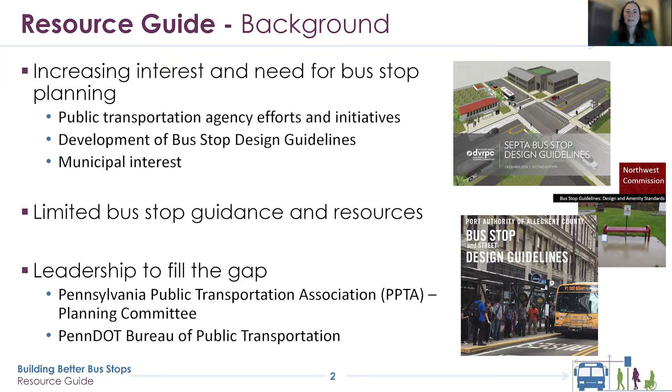In addition, there's been a lot of municipal interest in bus stops, and particularly how to improve bus stops as part of land development projects. So while there's been all this increasing interest, there is a lot of limited bus stop guidance. Particularly in Pennsylvania, there's over 34 different agencies that operate fixed route service throughout the state, and really only a couple had bus stop design guidelines available. So everyone else was borrowing SEPTA's, I would say. And many of the guides available both within the state and across the country are focused on much more urban contexts. So there was this gap of how can we support bus stop planning and better bus stop design for suburban and rural communities in Pennsylvania?

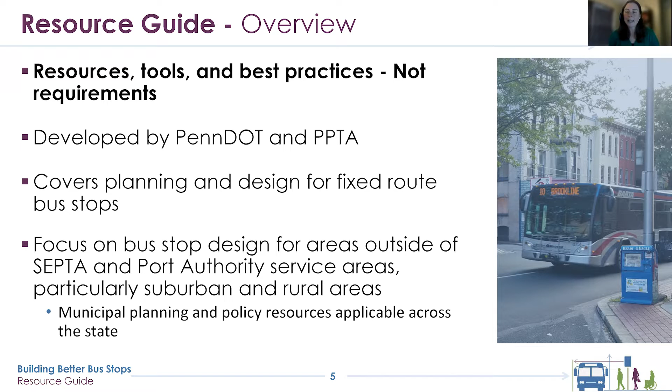It covers planning and design, particularly for fixed route bus stops, but some treatments and strategies might be appropriate for other types of bus or transit service, such as paratransit. We focused particularly on suburban and rural areas, but the planning and policy component is applicable across the state.

However, we know that enhanced bus stops are relatively low cost, and they can have a significant impact on safety, on ridership, and on transit operations. So the resource guide hopefully gives some solutions to solve these common challenges with bus stops.

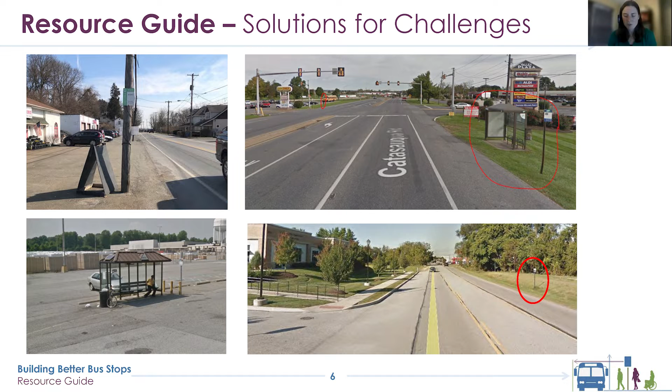One of the issues I've encountered recently is that bus stops are really challenging. They seem so simple, but when you try to make bus stop improvements and enhancements, it becomes very difficult. One challenge is that each stop or location may have different requirements in place, so it's hard for anyone involved with bus stops to know the requirements and steps—it depends on the location.

Each municipality may have different zoning or other ordinance requirements, or requirements for building permits. It depends on the type of improvements—if they include a shelter, you may have to involve PennDOT or an advertising agency. It might also depend on the funding source; if you're using federal funds, you may have to go through NEPA, including Section 106 coordination for historic resources.

So it's hard, I think, for all of us—whether a municipal representative, designer, planner, or engineer—to know all these different requirements and what you might encounter when trying to make a bus stop improvement. So this is really a call for all the creative minds: if you want a challenge, start working on bus stops.

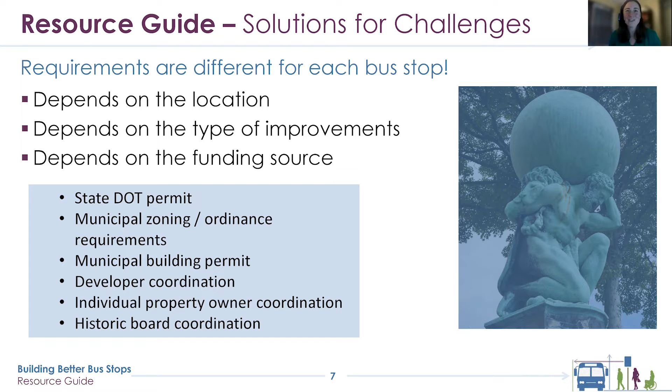One of the key challenges and opportunities is that bus stops require partnership—there's a village that's involved. Interagency coordination and partnerships are critical to successful planning and design of bus stops. Municipalities control land use, transit agencies operate service, PennDOT provides funding, and MPOs and RPOs do long-range planning and programming of federal and state funds. Everyone has a role to play, and it's important to understand those roles and how everyone can work together to improve bus stops.

The rest of my presentation will give a quick overview of the resource guide. It's organized into three parts: Part 1 is planning and policy resources, Part 2 is design resources, and Part 3 is typologies. For everyone who needs the Reader's Digest version, there's a 10-page quick reference—a brief summary that's a great tool if you want to share this document with municipal or elected officials who don't work on bus stops daily.

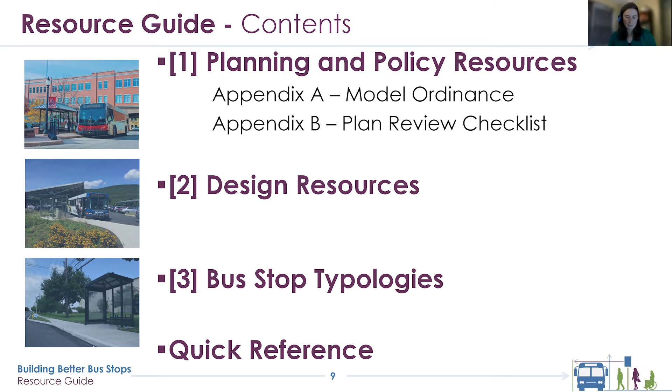I'll first start with Part 1, the planning and policy resources. This part is particularly geared towards municipalities, transit agencies, MPOs, RPOs, and planners. But if you're a traffic engineer on the call, don't fall asleep—there are planning elements critical for development of transportation impact statements or studies, as well as reviewing land developments, which you may do on behalf of a municipality.

Transit is heavily influenced by many aspects of land use, including density and design. Municipalities, as the ones that control land use in Pennsylvania, have a key role to play to encourage development and design that can foster public transportation and provide community benefits related to public transit.

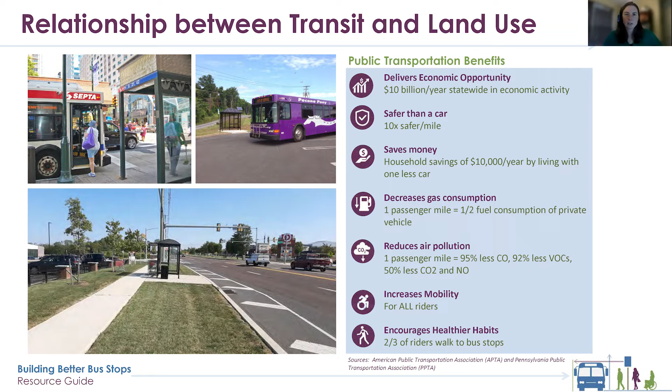There are a number of opportunities for municipalities to incorporate transit into their fundamental plans and ordinances, such as the comprehensive plan, zoning ordinances, SALDO, and the official map.

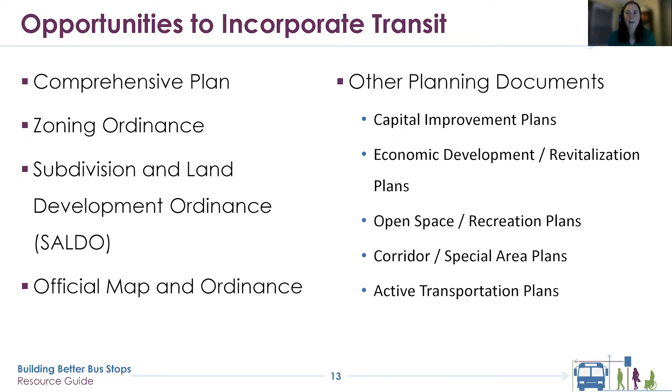The resource guide highlights some key steps for incorporating transit into municipal plans. One thing to note is that it's at every step in the planning process. It starts when you're evaluating existing conditions, knowing both where you have existing routes and stops, and also knowing where you have potential transit generators or communities that might need transit.

The next phase in planning is often looking at future needs and conditions, thinking about how land use and demographic trends might change your need for transit. And lastly, incorporating transit into some of the recommendations included in the plan.

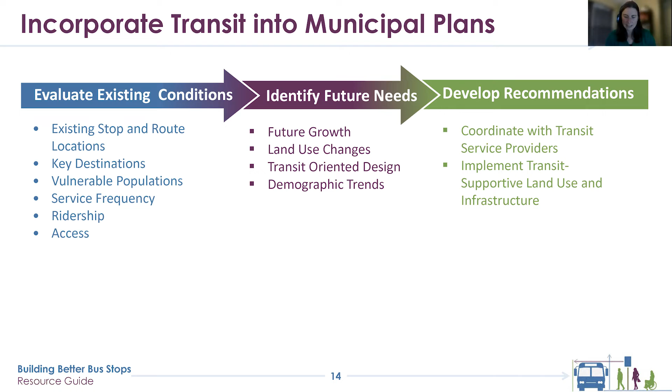The resource guide summarizes some of the best practices for transit supportive land use. This includes concepts such as focusing growth along transit corridors, requiring pedestrian networks within a site, and reducing parking minimums to encourage transit ridership.

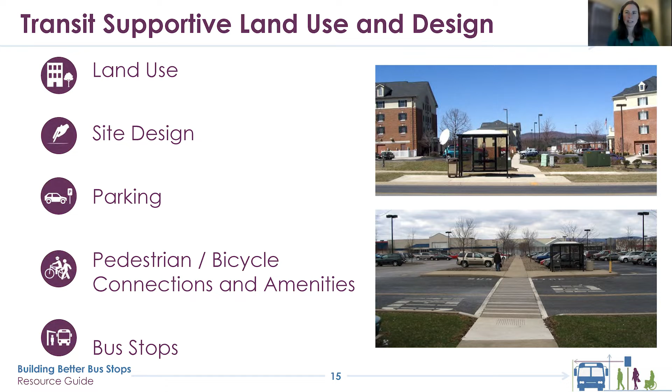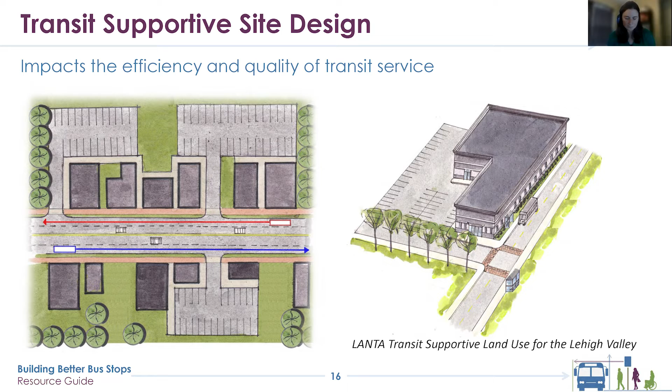One of the key resources included in the guide that I hope is helpful to all of you is the model ordinance language. There's model ordinance language for both zoning and subdivision and land development, or SALDO.

The model ordinance language includes clear definitions of common elements of bus stops. This is one of the most important things, especially if you want to start asking developers to help with providing bus stop infrastructure, so that everyone is talking the same language about the potential improvements.

The model ordinance also provides guidance related to the location and design of bus stops. An important one is requiring coordination with transit agencies, as they're an important part of the planning process. It includes some specific design guidelines and requirements for bus stop infrastructure, including ADA loading pads, bus shelters, benches, and signs. So the model ordinance language is a great starting point, but it will need to be modified and tailored to the specific needs of each community.

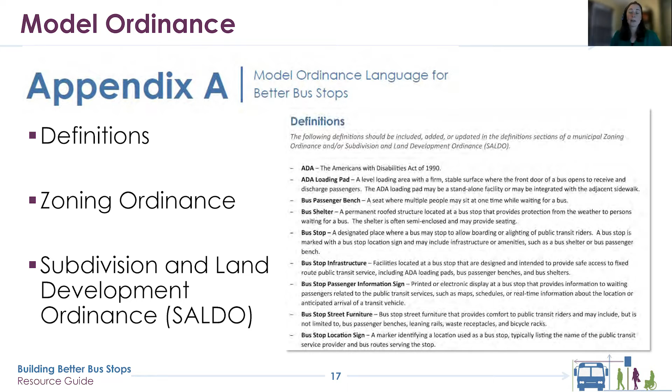We have heard that some municipalities have already incorporated some of this language into draft SALDOs in particular. I believe Lower Merion Township and Susquehanna Township have incorporated and utilized this model ordinance language as a starting point for their SALDO updates.

The guide also includes a plan review checklist, and this can be used by municipalities, designers, or others to evaluate whether you should be considering a bus stop and if the design plans include appropriate infrastructure.

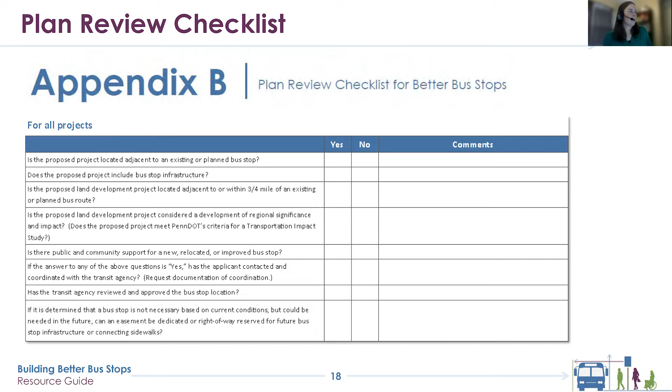I'm also going to share in the chat some links to SEPTA's Transit Supportive Community Development Initiative page, as well as the checklist that SEPTA has developed. It was based on the checklist in the Building Better Bus Stops guide and can be used specifically within SEPTA's service area. It's a great resource for municipalities as well as designers.

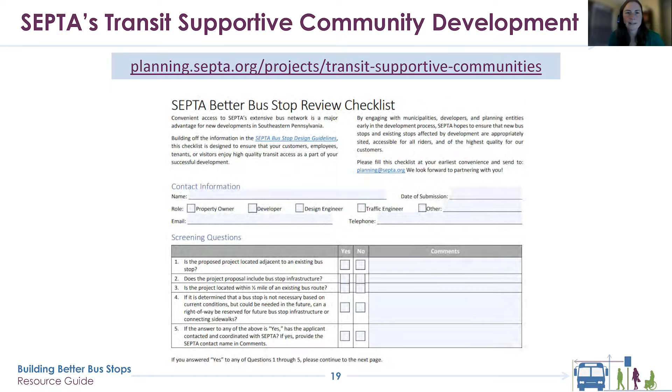So I often hear people say, well, it's great to have plans, but we really want to see improvements. We want to get something done. How do we implement bus stop improvements?

The guide provides a couple of different strategies and resources for implementation. First and foremost, one of the most cost-efficient and effective ways is to simply incorporate bus stop improvements as part of other related projects. It may be a transportation improvement project led by the municipality or PennDOT, and the PennDOT Connects process is a great opportunity to start the dialogue on what transit infrastructure may be needed and appropriate, and can be incorporated into a transportation improvement project.

So now let's talk about some of the design resources. This is part 2 of the guide, geared more towards transit agencies, PennDOT engineers, as well as municipalities. Something to stress is that bus stop designs should be developed through coordination with the public transit agency, the owner of the roadway, and possibly the adjacent property owner. So you can't do these designs in a vacuum.

Bus stop design directly impacts public transportation riders in terms of accessibility, safety, comfort, and convenience. But the design also impacts the quality, efficiency, and cost effectiveness of the public transportation operations. Since each bus stop is unique, the design has to be based on the specific context, the potential users, the roadway, roadside features, and the land use context.

So while this guide, and you'll see some images included that show example bus stops, really those are just a starting point to generate ideas. Each bus stop design is unique.

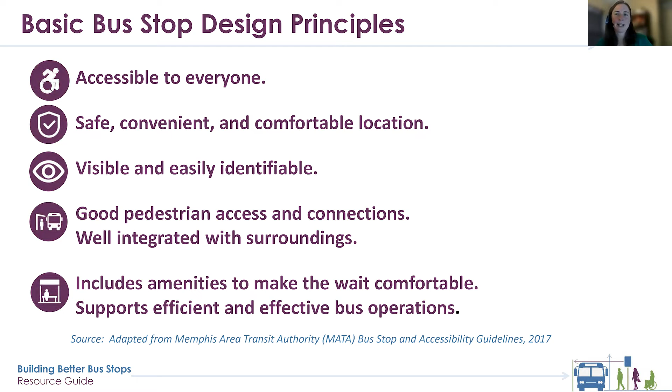So the guide includes some high-level steps for planning and designing a bus stop. The need for either a new or improved stop can come because there is a transportation improvement project nearby, or a nearby land development, or it may be a community request, or it may be something like Chester County identifying high ridership stop locations within the county.

Once that need is identified, the next step is to evaluate whether you need any improvements, what improvements are feasible, and that requires coordination with the transit agency. I want to note that even if the transit agency says we can't serve that warehouse now, there might be reason to still incorporate some transit related infrastructure into the plan, whether it's a transportation improvement plan or land development plan. It could be reserving right of way or providing some pedestrian infrastructure so that it is possible to serve a location or provide transit in the future.

But if it is agreed upon by the parties, particularly the transit agency, that the bus stop improvement is warranted and is a good approach, the next step is to move into design. That includes looking at the placement and configuration of the bus stop, some of the bus stop key elements, as well as the permits and approvals that may be needed both to install and maintain the infrastructure.

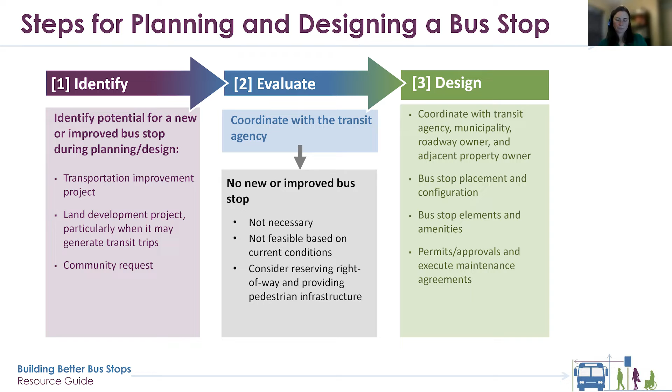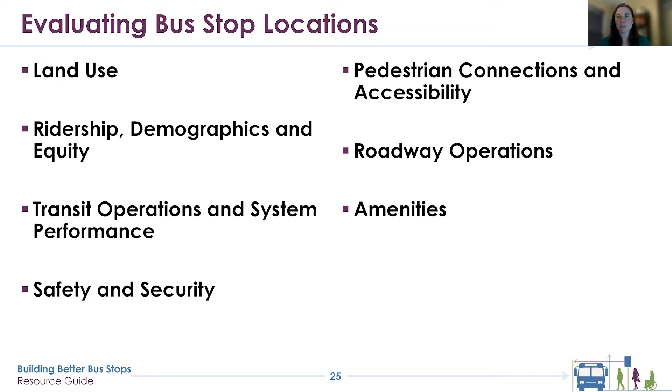The guide touches on evaluating potential bus stop locations, and there are a lot of factors to consider. So the guide includes a number of questions to ask yourself as you're looking at potential bus stop locations. I will emphasize here, it's important to note that bus stops are like shoes and they come in pairs. So while a lot of the graphics in the guide and presentation show one bus stop, it's really important that as planners and engineers, you think not only about the one bus stop you might be looking at, but about the adjoining bus stop. Because if someone is getting on or off the bus, they're likely making a return trip and will need to cross the street and access the paired bus stop.

There are a number of other siting and design considerations for bus stop locations. For the guide, we based it on a 40-foot vehicle, which is the most common size. But again, this is a reason to coordinate with the transit agencies to understand what is the size of vehicle that might be servicing the area and how that needs to be incorporated into the design of the bus stop improvements.

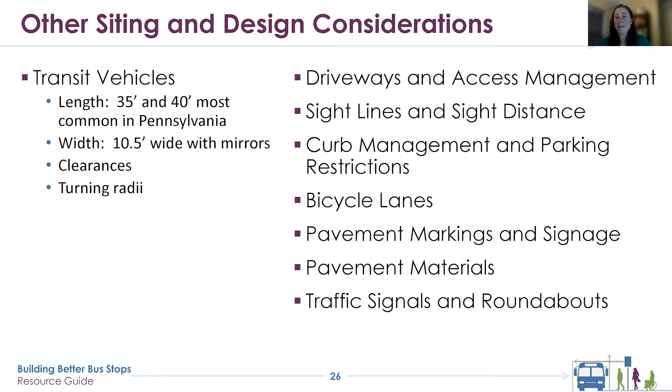The resource guide also provides information on best practices for everything from driveways and sight distance to pavement markings and traffic signals. So now let's talk about some of the bus stop design basics.

First is bus stop placement, which refers to where the bus stop is located with respect to the intersection. There are three basic locations along the roadway: far side, which is after proceeding through an intersection; near side, which is before the intersection; and mid-block, which is between the two.

Far side stops are generally preferred by transit agencies because they minimize potential conflicts between the bus and vehicles, and also provide for safer pedestrian access. Near side stops may be appropriate at key transit generators or where the bus is making a right turn.

Mid-block stops are typically only encouraged where a near side or far side location isn't feasible. One reason is mid-block stops are a challenge because they need to be paired, so you have to think about how someone getting on or off the bus at that location would be able to make their return trip.

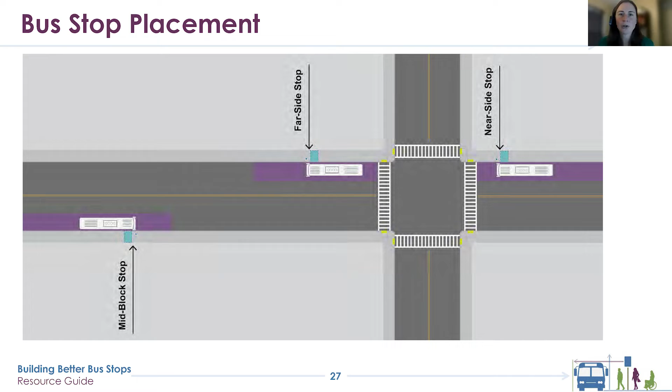Once you know where the bus stop might be located, you can think about the potential configuration. The configuration impacts how riders get on and off the bus and how the bus integrates with the roadway, the streetscape, and the surrounding environment.

Roadside or curbside stops are located along the road and typically don't require modification to the curb. These are by far the most common type of stops. Key considerations for roadside stops include the available curb length without obstructions, pedestrian and ADA access, and traffic volumes and speeds.

Think of yourself as an operator having to pull the bus to the curb to allow passengers to get on or off, and being able to re-enter traffic and do that all safely.

Finally, bus bays or pullouts, also called turnouts, are a designated area for the bus that doesn't block the travel lane. This configuration is typically used on roadways with higher volumes or speeds, or where the bus may have a longer dwell time, possibly a layover related to the schedule.

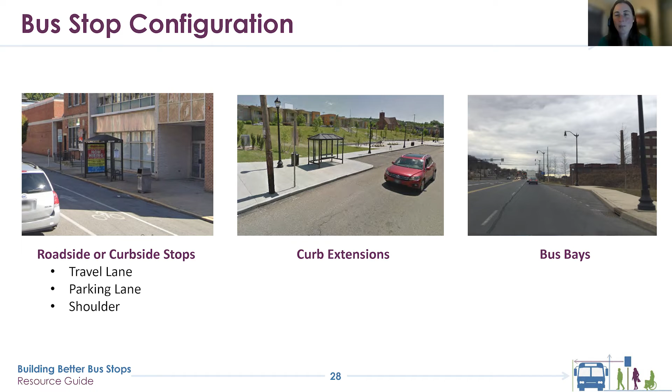Some of the concerns with this design are the ability for the bus to re-enter traffic and some impacts on parking or sidewalks. In our research, this is one area where there aren't great design standards—they're outdated. It's an area where PennDOT is actively trying to get funding from national resources to develop better design standards for bus bays.

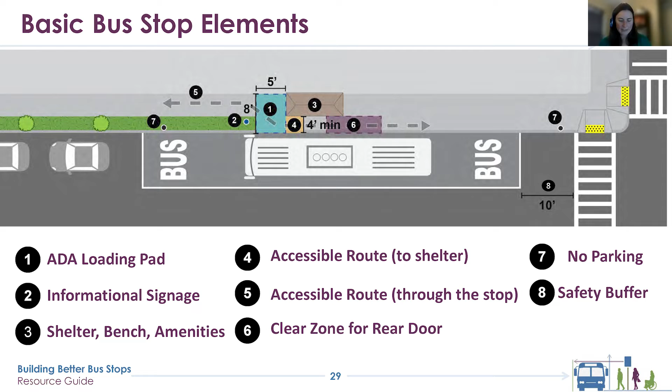Now we're going to talk about the basic elements of the bus stop—where it's located, how it relates to an intersection, the curb line, and how it relates to the roadway and traffic. We'll look at some of the basic bus stop elements, and I'll go through each in more detail.

I'm going to start with the ADA loading pad, which is one of the key fundamental elements of an ADA compliant bus stop. The ADA loading pad is a firm and stable surface, typically concrete. It's not usually a different color—you might not even recognize it because it just looks like sidewalk. But it's a clear area that's at least 8 feet wide, measured perpendicular to the road, and 5 feet measured parallel to the road. A wider pad can be provided and is desirable.

Think of yourself as the bus operator trying to pull a large transit vehicle with passengers to the curb and having to get that front door directly aligned at the ADA loading pad. So you can see how a wider loading pad can be desirable.

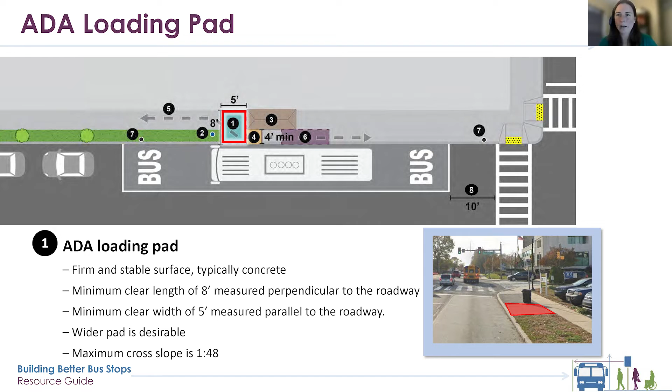One thing that's important here comes back to definitions and the importance of terminology: an ADA loading pad is not an ADA curb ramp.

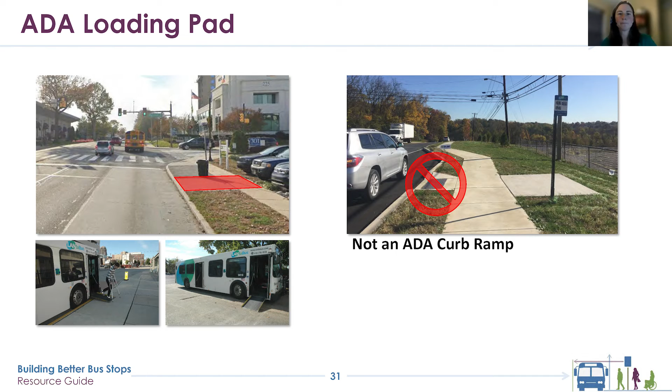Can I jump in on that for a second? I think the issue is that the ADA curb ramp provides access for pedestrians to the adjacent uses, but it is not intended to be access to the vehicle itself.

Great point, because ADA curb ramps at crosswalks are an important part of the access to and from bus stops.

So just a little more on the ADA loading pad, because it's really important to understand how it can be done, and it can be fairly simple. This shows two different configurations depending upon whether there's a grass buffer area between the curb and sidewalk or not. Again, this is not something that's any more than a sidewalk, and it's one of the key elements of an ADA-compliant bus stop.

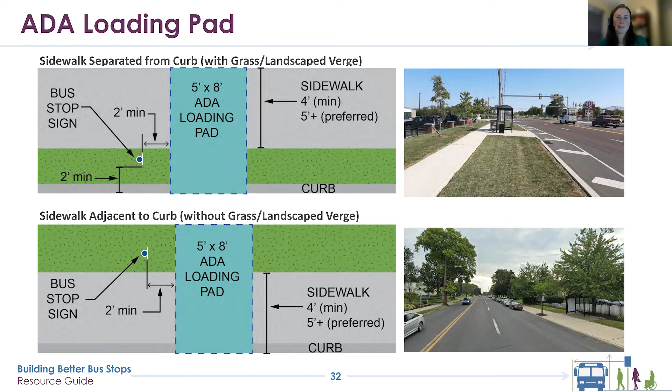Another fundamental element, and probably the one we all recognize the most, is an informational sign - the sign that says the bus stops here and which routes are served. This is typically provided by the transit agency.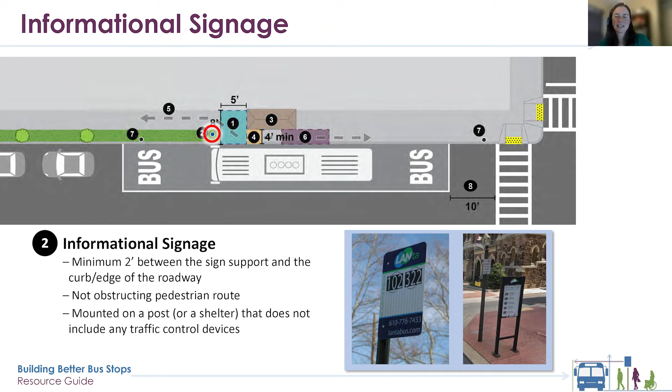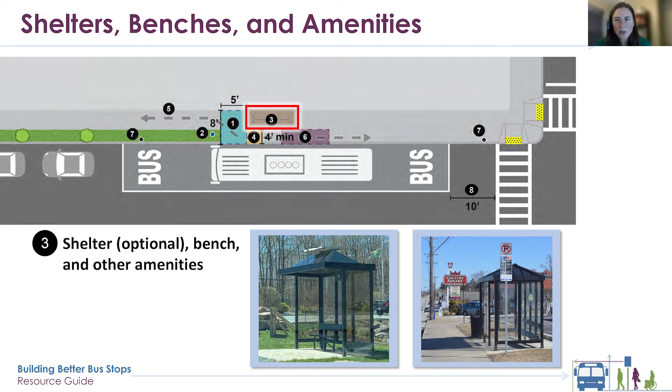There are a number of amenities that can be provided at a bus stop depending upon the land use context, ridership, and a variety of other considerations. The guide includes design guidelines for shelters, benches, and other amenities. It's important to think about how people will access the shelter and get between the shelter and the ADA loading pad through an accessible route, and also to think about ongoing maintenance, which I'll touch on later.

This highlights the need for that ADA-compliant accessible route between the loading pad and the shelter, highlighted in this area in red.

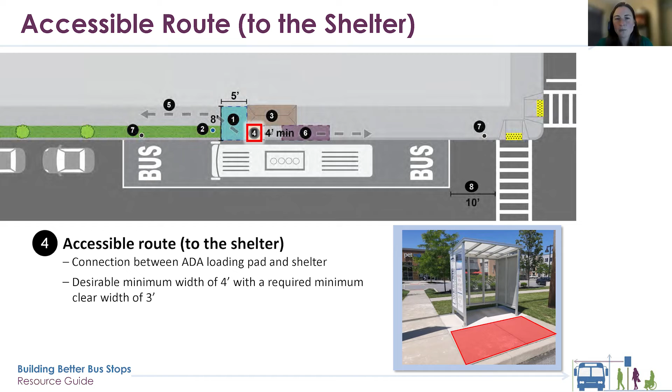It's also important to think about how your bus stop, which is usually part of your streetscape, relates to the broader streetscape, and maintaining a pedestrian-accessible route through the stop area, which should be at least 5 feet wide with a minimum clear width of 4 feet.

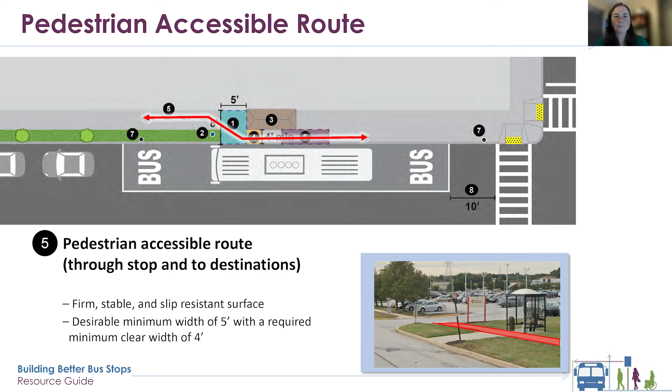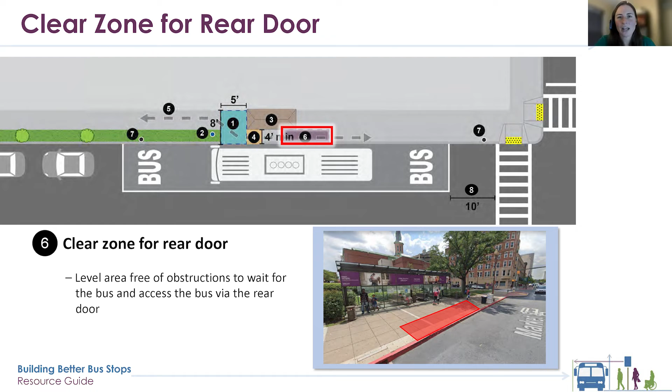Something that's become a bit more important, I've heard from transit agencies during the pandemic, is use of the rear door. While we focus a lot on the front door and providing ADA access there, many riders use the back door and don't want to get off into the middle of a tree or a bunch of signs. So planning for a clear area at the rear door, free from obstructions, is also important.

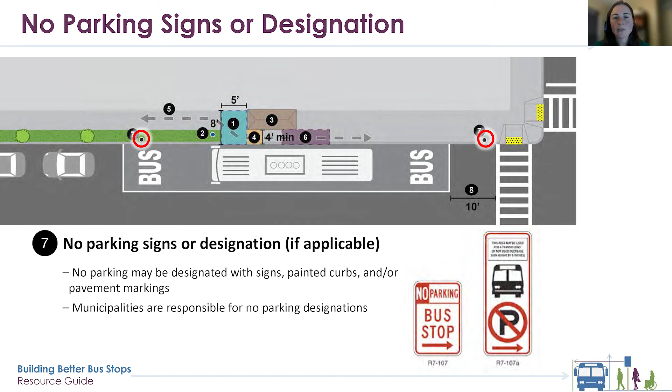For a curbside stop, thinking about parking is really important. Remembering the ADA and the transit operator - if they're going to pull the bus to the curb and deploy a ramp, they have to be able to get to the curb, and parked vehicles can prevent that. This is a key role for municipalities in helping to make bus stops accessible and supporting transit overall: making sure the no-parking designation is clear and maintained, whether with signs, curbs, or other pavement markings.

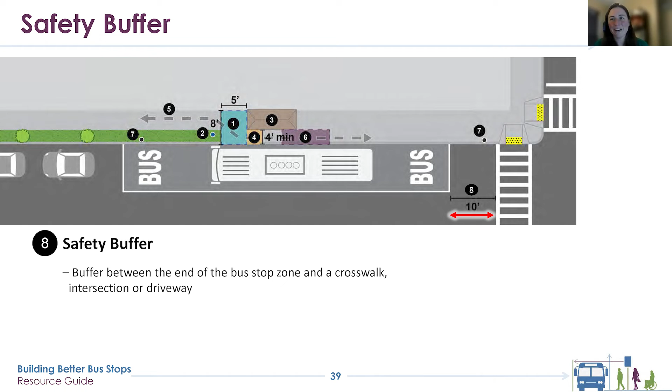A number of bus stop designs require considering how they relate to crosswalks. The guide recommends a minimum 10-foot-wide safety buffer between the end of the bus stop zone and a crosswalk, driveway, or intersection, so the bus doesn't end up with its rear in the middle of the intersection or blocking a driveway if possible.

Municipalities and other partners may also be interested in providing additional amenities at a bus stop - benches, bicycle parking, trash receptacles, lighting. It's important to think about how these amenities don't negatively impact other bus stop features, design, and operations - for example, you don't want a trash receptacle placed where the rear door access is.

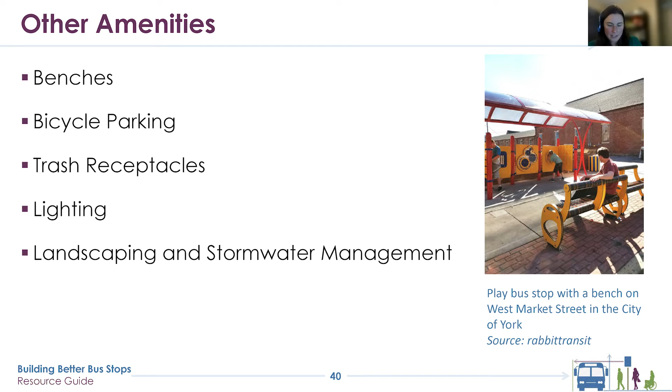When you're planning and designing a bus stop, you have to think about what permissions and agreements you need and about long-term maintenance. There should be a written agreement between responsible parties to maintain a standalone ADA pad, a bench, a trash receptacle, or a bus shelter. PennDOT does require a transit shelter agreement for any bus stop infrastructure in the state right-of-way.

Bus stop infrastructure can require routine and ongoing maintenance, such as emptying trash cans or removing graffiti, and at times more significant repairs, such as replacing a bench or a shelter. The maintenance can be an opportunity for partnerships between different entities, so you can think about having one entity install the infrastructure and another responsible for ongoing maintenance.

I'll note here, and I'm sure Mark will reiterate this, that SEPTA does not typically own bus shelters. That is usually taken on by the municipality in partnership with adjacent land owners and/or advertising agencies.

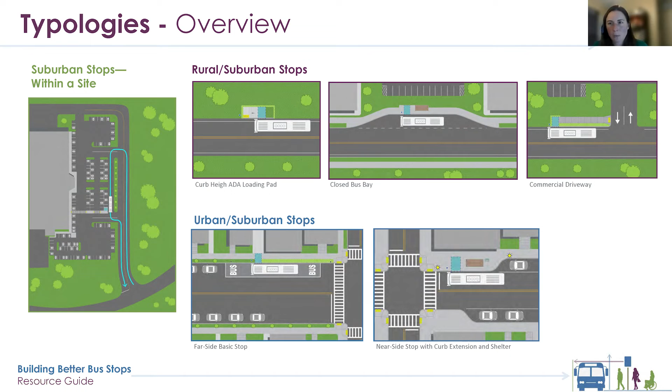Again, I'll reiterate that any bus stop design should be done in coordination with the transit agency as well as the roadway owner, such as PennDOT and the municipality. So I'm going to go through a couple of the typologies and highlight some things that might be of interest. First is a rural or suburban stop with a street level ADA loading pad.

Think of your typical rural stop, which is currently a sign maybe on a steep embankment on the side of a road. The idea here is to provide an ADA loading pad, an area for passengers to board and alight the bus, and then access to the public right-of-way, which in this case is the roadway.

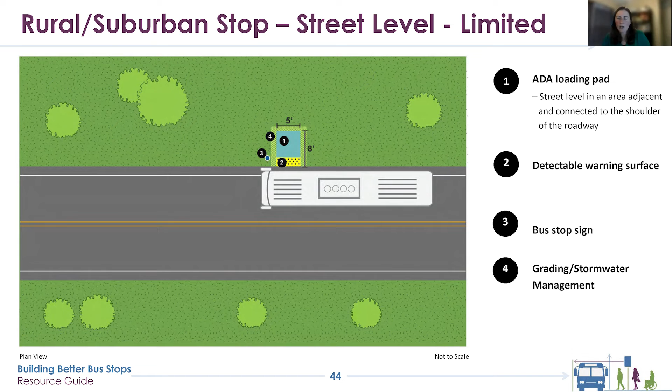It's a little hard to see or visualize in this plan view, so we do have a 3D view and also a sample image that shows how you can provide a level, stable surface for the ADA loading pad. You can see how this is a relatively simple design, but really makes the bus stop a place within the community.

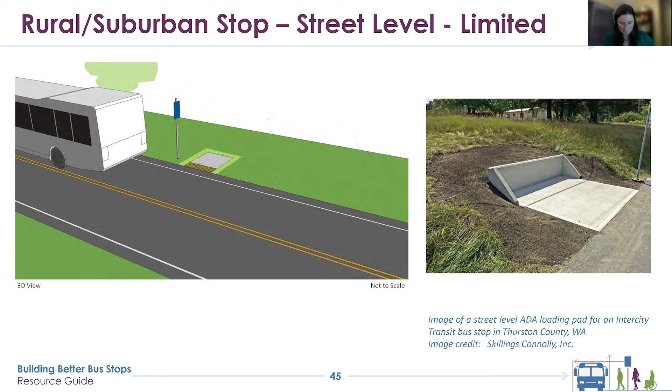As I mentioned, because of the ADA requirements and the ramp being deployed from the vehicle, it's desirable to have that ADA loading pad at curb height. So this is a rural or suburban stop with a curb height ADA loading pad. With a curb height ADA loading pad, you need to provide a ramp and then a landing area for access to the public right-of-way, which again in this case is the roadway.

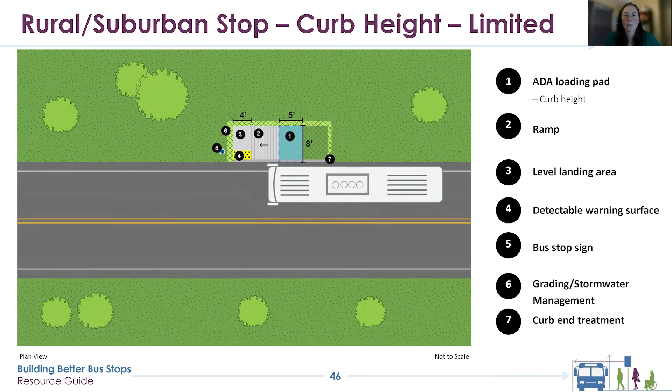Here's a 3D view of the curb height ADA loading pad, and you can see the example image as well.

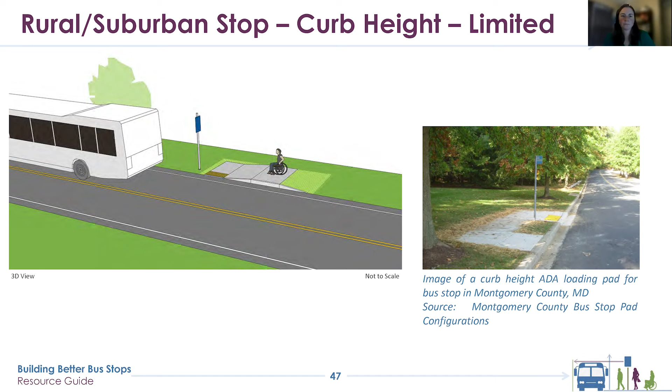While it's desirable to provide sidewalk connections everywhere, we know that's not possible, which is one reason we show those rural and suburban stops with isolated ADA loading pads. But even better than that is to provide a sidewalk connection to the nearby generators. This example may be a commercial driveway — it could be an office building, a fast food driveway, or a retail shopping center. It's really important to think about how you can provide at least a sidewalk from the bus stop to the driveway, and even more ideally, provide pedestrian infrastructure and connections to the front door.

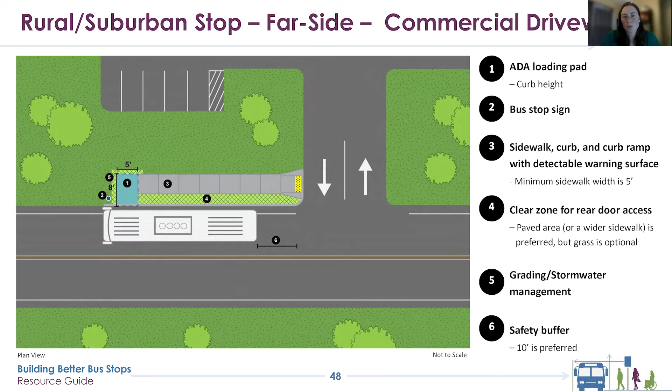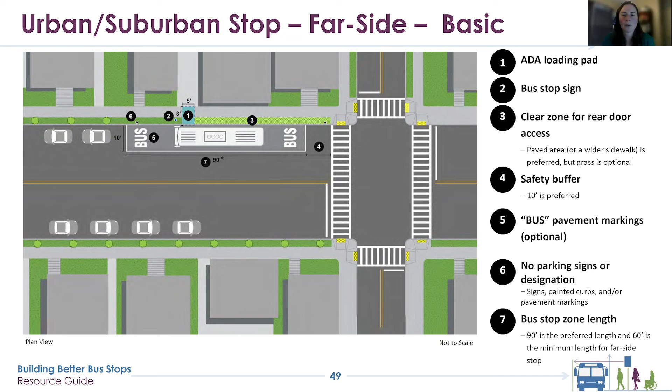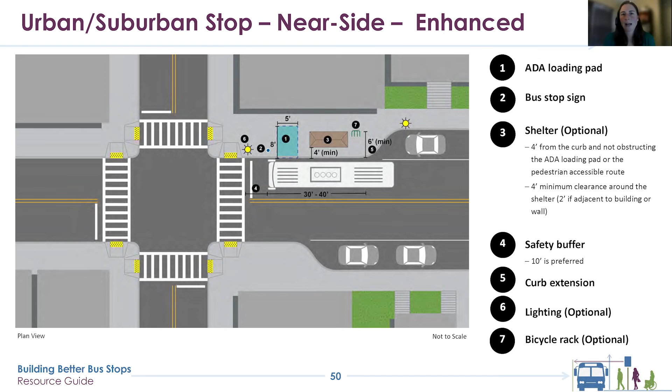This is an urban or suburban stop that's near side, and it shows some enhancements. It has pedestrian lighting, a shelter, a bicycle rack, as well as a curb extension.

Lastly, the guide goes into some detail for suburban stops which may be within a site. In general, transit agencies do not want to deviate from their primary bus route, but in some situations it warrants deviation to serve a key transit generator. There are a number of considerations for how the bus both circulates within that site and also providing bus stop facilities within that site, making sure you're not conflicting with high traffic areas at the front door, but that you are providing pedestrian access and connections between the bus stop and the front door.

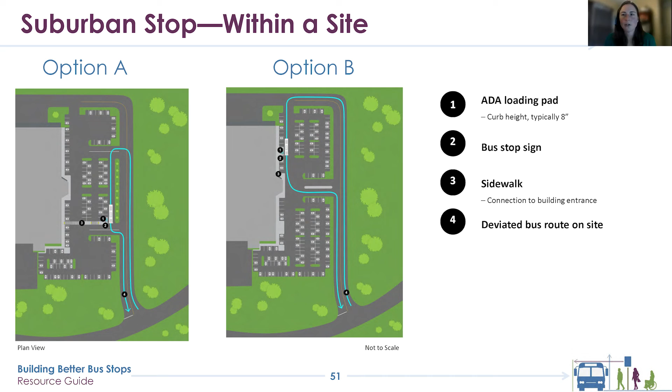There's a lot of great information in the guide about stops within a site. Again, the development here could be a warehouse, it could be a shopping center, it could be a multifamily housing development. So there are a number of different transit generators which may warrant considering diversion and a stop within a site.

So key takeaways. I hope this provides a great summary of what you should remember as you get ready to build better bus stops. One is proactive planning. I think the best thing we can all do is start to think about and incorporate transit upfront in all of our plans. I hope that the model ordinance language and the checklist are great tools and a starting foundation for that proactive planning process.

I've emphasized that bus stops are complex, they're not easy. So if you're going to tackle one, start small, start easy. Pick one stop in your community, or pick a handful of stops. I think this is the strategy Chester County has taken in identifying some high ridership stop locations where bus stop shelters and amenities might be warranted.

It's important to build strategic partnerships along the way. I think in Chester County, you have a lot of the representatives from those key agencies on this call, including TMACC, the county, SEPTA, and others. And continue to seek opportunities to integrate the improvements within existing projects.